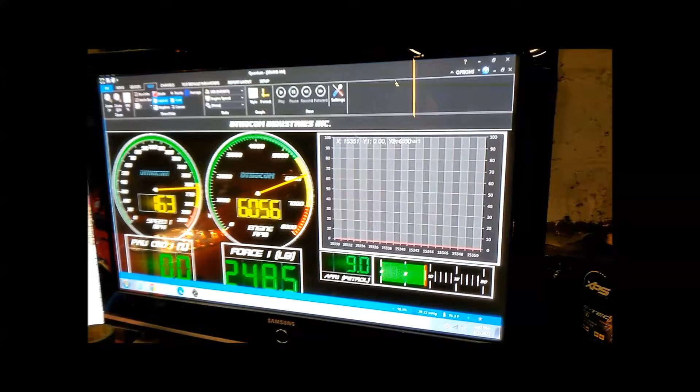Okay guys, I am back and we've got the final dyno results here, so let's have a look at them and see what happened. First thing you'll notice is that all the curves are a little bit more consistent, they're more tight together, and I'm not sure exactly why this is. It could just be that he didn't leave the engine running as long between runs,

so there wasn't as much heat soak. It could also be because the thermostat and other modifications that I put into the car that enhanced cooling allowed the fans and everything to work in harmony with the thermostat and keep those engine temperatures pretty stable. Because as I said, I had to reprogram the car after doing all the physical mods to take full advantage of the effects, right? So you can see that the heat soak has definitely been significantly reduced.

Also, notice peak torque. Holy shit, like we're getting 317 pounds on the best run, and I've got no reason to believe that that's actually the maximum that the power band has in it, because we're only starting the run at 3,000 RPM. All torque right at the beginning. It looks like a Tesla curve, to be honest. Like, this is what a Tesla looks like. An electric motor has like 100% torque at 0 RPM. That's what this looks like.

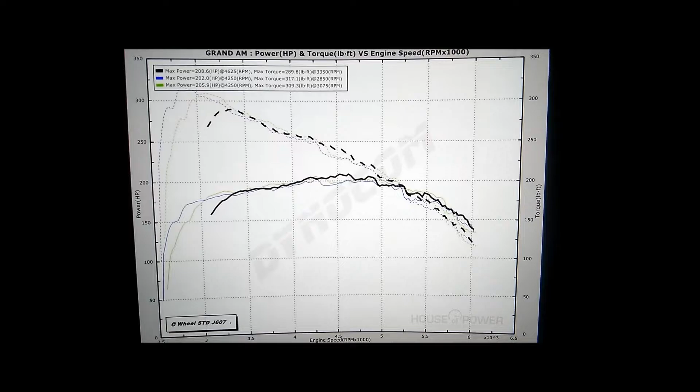It's really torquey. But the problem is it still falls off after 5,000. You can see that the mods didn't do much to flatten out the horsepower curve as I had hoped. Now, because this is hard to compare back to the first graph, let's just overlay them. So all I did was take the raw data from both graphs and throw it into Excel. So let's take a look at the Excel graph with both curves overlaid and see how they compare.

All right, so here we've got a graph with both curves overlaid onto each other. So you've got the pink at the top, which is the torque curve for the modded state of the vehicle. The blue is the original, the stock. And then horsepower is depicted in dark blue and yellow, respectively. So you've got the modified horsepower and the original horsepower in yellow. So the yellow and light blue are the original graph, and you can see that essentially you've got railroad tracks,

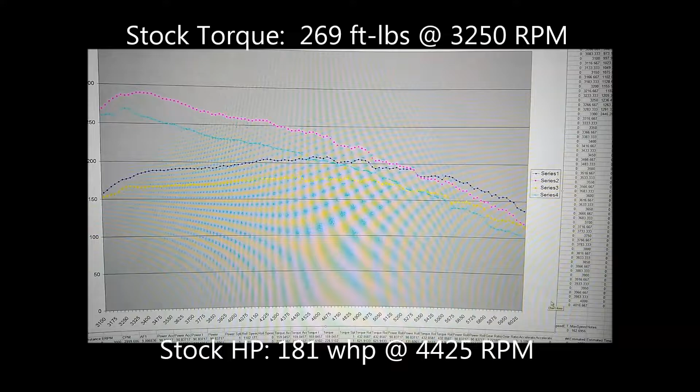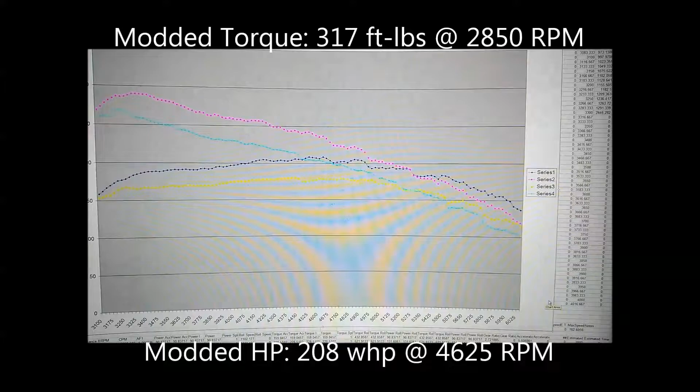essentially. So the modded curves are following the stock curves pretty closely, with a pretty predictable gap in between them, which is indicative of the pulley size drop. Now, normally, just dropping a pulley would merely increase the boost pressure. You'd go from 7 psi to maybe 10 psi, and that would increase heat and would make the blower run less efficiently and all this. And you might not see this graph, but because the other mods help to keep the car cool, enhance airflow, and that sort of thing.

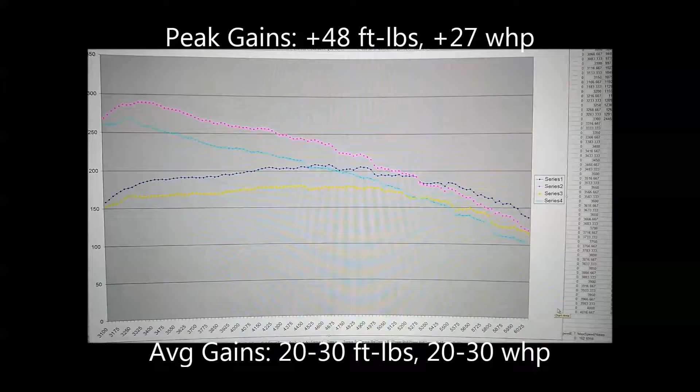Even though you're not seeing the effect that I was hoping to see, where it flattened out the torque curve and gave you a lot more meat at the top end, you're still seeing that the curves run fairly parallel to each other, meaning that there's no bottleneck in the system. And the bottleneck might have been there had it not been for the mods that we did. So I guess rather than getting a benefit from the mods in and of themselves, I'm merely eliminating a bottleneck that would have otherwise been there.

And I'm also thinking that maybe having a 3-inch exhaust might have made a bit of a difference too. And of course, if you had something like solid lifters or other more extreme mods, maybe a cam, you'd see a different effect. I've looked at other dyno graphs from similar Monte Carlos, same era, similar mods. And although they did have a pretty steep torque curve, just like I do, they didn't fall off quite as badly at 5,000. So this is a bit of a mystery to me. It'll continue to be so until I figure out what's going on.

But I'm not disappointed, because you're still gaining power throughout the entire power band. And while I'm not able to raise my shift points, it doesn't really matter, because I'm getting so much torque at the low end that even in higher gears, you're still getting a tremendous amount of force laid down on the pavement. And look at the horsepower. Horsepower would normally be a rising slope, but this horsepower curve, because there's so much torque available right from the beginning, it's pretty flat. So you're getting pretty much maximum horsepower all throughout the range.

And I just cut it off at like 5,000, 5,100 and shift there. Because at that point you've got dropping torque, dropping horsepower, and the force being laid down on the concrete is not increasing. So I just cut it off at around 5,100 and shift, and I get to take advantage of everything to the left of that, which is a lot. So I'm thinking that the best thing to do for this car now is just to improve the grip by getting better tires.

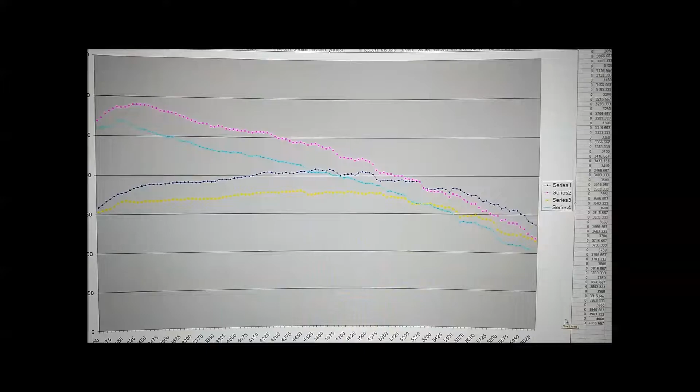Better tires means that you can launch at a higher RPM, get that power raised up even faster. So you can see that the pink curve, for example, is peaking at around 3,200, 3,300, something like that. Again, that's just because that's where he had to start the test. But if you had your foot to the floor the whole time, right from zero, and you were able to hold traction, I'm sure that the peak would be even further to the left, and the horsepower curve correspondingly would be even flatter. So you got a lot of area under the curve to take advantage of. The car should be a 6-second car at this power level, and I'm quite happy with the results.